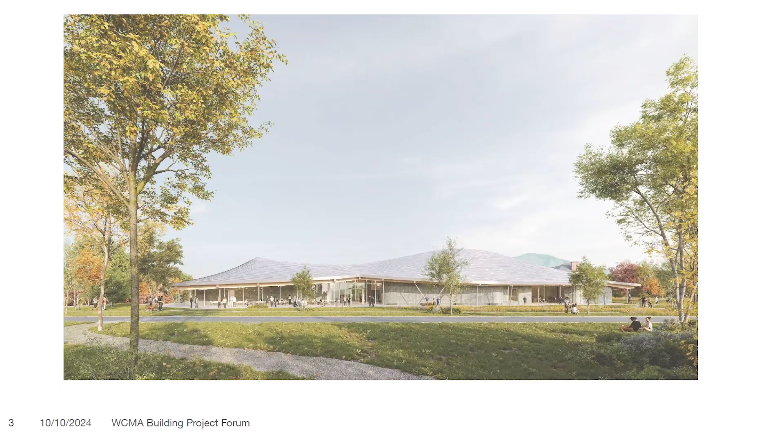The other cool thing in the exhibition at the museum is there's a model, so it's really fun to see that. This is the view from the south. It is the view essentially from the Rotary.

So the roof is clearly a defining feature of the building, with an elegant profile that resonates with the mountain landscape, and material that really harmonizes with the quality of light outdoors and contributes to an open, integrated feeling with the landscape. As you can see from the image, the new museum will largely be on a single story, with all the public, gallery, and classroom spaces on the same level as the entrance. The idea is to create an expansive ground floor experience and ease of access and navigation.

The other thing I love to highlight at this early point is the location. It is at the entrance to campus and at the entrance to town, and it carries a really energizing message that Williams and Williamstown are a place of creativity and community. The welcoming and approachable design signals that the arts are for everyone and really an inclusive and generative force in our town.

The new museum is being built for greater access to students in the form of an expanded study center and expanded exhibition space, also as a hub for the community, as a welcoming, accessible, free, always free space for spending time with art, attending special programs, including what we expect to be an expanded K-12 program and family programming in our new facilities. We haven't been able to do as much of that before, but we're excited about doing that going forward.

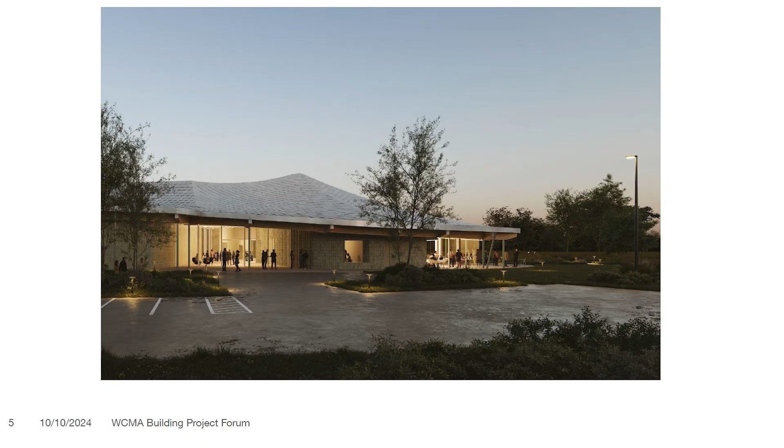One of the really special things in focus for tonight is that the building architecture and the landscape architecture are conceived totally integral to each other. We're really leaning into the interdependence of museums, art, and the natural world, and we're excited about the landscape being equally part of our educational and aesthetic program. So the values of environmental stewardship, educational potential, openness, lightness, seasonality—these have all been guiding principles for the landscape design from the very beginning.

With these aspirations, Reed Hildebrand has been the ideal landscape partner, and I'm really delighted that Beka Sturges is here to present the landscape design in progress tonight. Beka is a principal of Reed Hildebrand. She manages the firm's New Haven office. She leads both private and public projects, and I want to highlight especially a few examples of her museum work.

She's currently working on landscapes for the Powder Art Foundation in Eden, Utah, the Smithsonian's Hirshhorn Museum and Sculpture Garden in Washington, D.C., and closer by, Storm King Art Center in New York's Hudson Valley. Closer yet, Beka has led the firm's work at the Clark for the last decade and has served as the project landscape architect and manager for its award-winning expansion. Reed Hildebrand has also worked with Williams College over many, many years on an overarching landscape assessment.

Most important for the mission and vision of the new WCMA, I want to highlight something I've found inspiring, and that is how Beka's way of engaging with the landscape, her deep love of plants and ecology, really drives her practice and the way she advocates for new ways to reconcile conservation and programmatic goals. She's a committed educator, which resonates with us very much, including as a senior critic at the Yale School of Architecture. Ecology and education are driving forces for the future of museums as a whole, and for WCMA in particular. We feel that the landscape design we're working on together with Beka will embody these passions that fuel her vision. So we make a great team, and I'm really thrilled to welcome you here tonight, Beka.

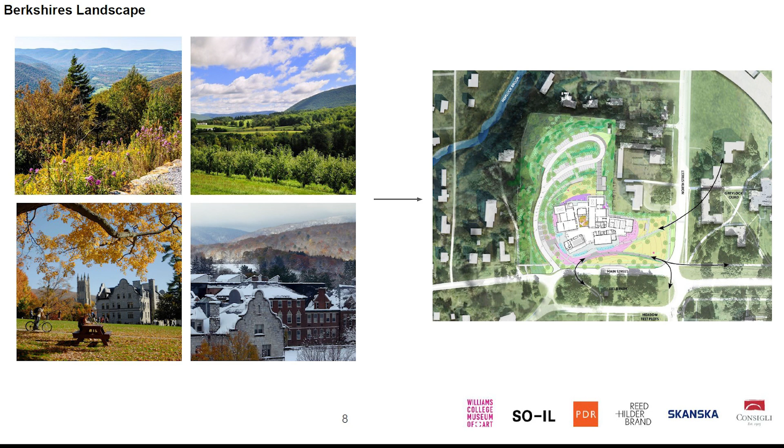And so I think we brought some of the lessons that we learned working on the Clark to the way we thought about this project here. With that in mind, we tried to bring together those distant views of the hills, the forests loved around here, the pastoral and college landscape that many people are drawn to Williams for, and try to return some of the views that had been obscured over time by the way the inn had been developed.

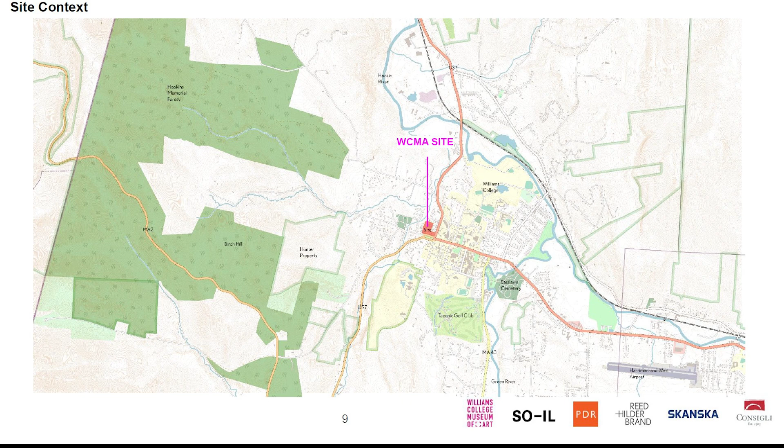So thinking about that site context, one of the things that's unusual for Williams about this site is that it's kind of at the edge of town. The fact that the forest is nearby is something we wanted to bring a little closer while bridging with Field Park and Greylock across the street.

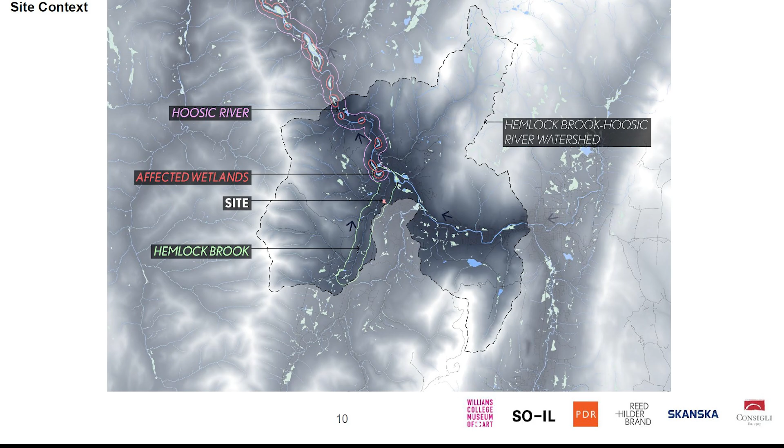It's also an interesting site because even though you don't feel it there, the stream, or brook, runs right by the edge on the west. We've been interested for a while in trying to make the streams and waters that surround Williamstown more central to how everybody experiences it. They're really beautiful, there's a lot of good habitat, the sound is soothing, and they bring great health to our communities if they're respected and treated well. So the fact that we're very close to wetlands and the brook on this site, we thought was a wonderful asset.

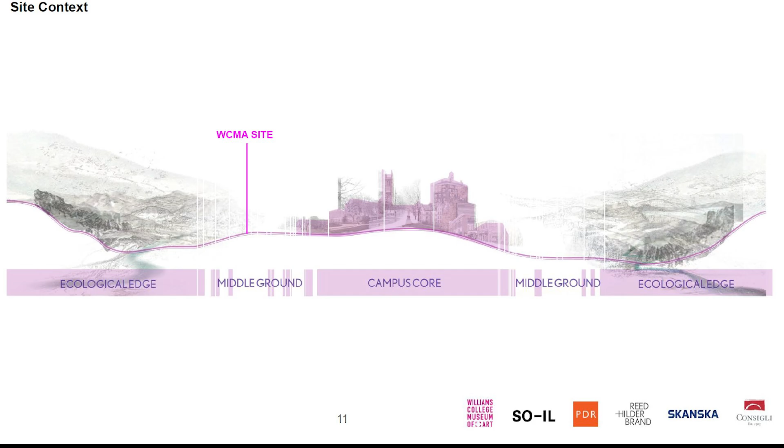Starting in 2017, we were invited to help Williams think about the campus landscape. It was an interesting project because it wasn't a master plan, it was very much a study, so it was called the Landscape Study. You can look at it online, it's available.

One of the things we came to understand about the Williams campus is that there's all this amazing nature at the edges, which we called the ecological edge. Then there's the campus core. But then there's this almost lost zone that hasn't seemed to have a really clear intention around it. We brought that forward as an exciting potential for the future of the college, in terms of thinking about designed ecologies and how you can teach an appreciation for nature and stewardship. This is the first project we've gotten to work on with a college that allows us to think about what that could mean—how can you design a site that serves all the needs for teaching and community coming together, and also seeks to achieve the highest ecological promise?

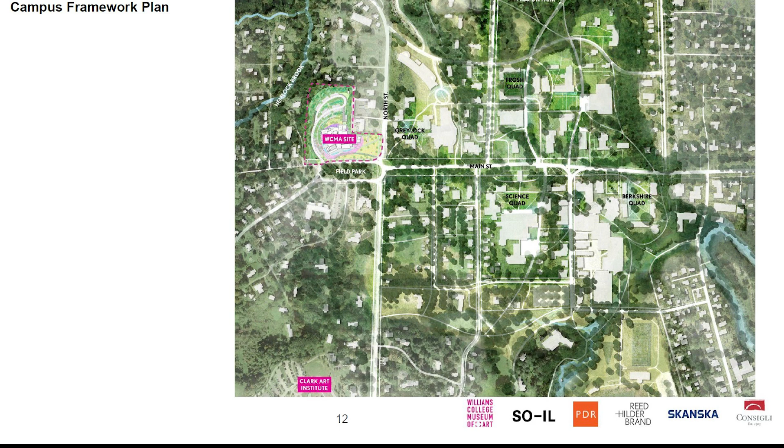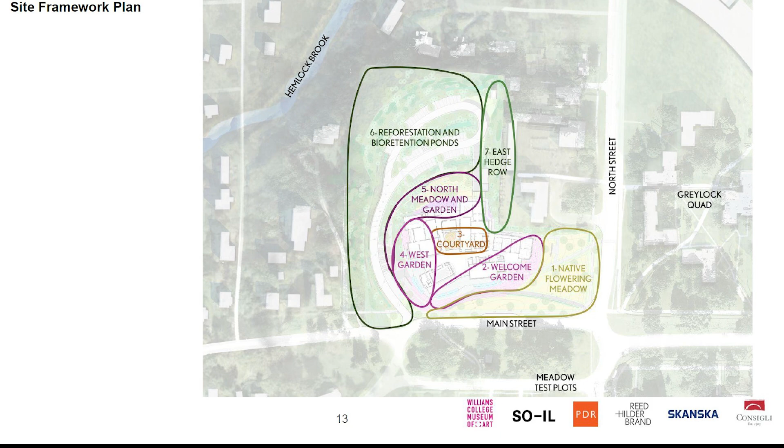In a similar way that the building itself, just as Pam was saying, responds to different conditions and reflects the activities happening inside, we did a study of the different east, west, north, south conditions and how we could reattach to our context, our neighbors. We've established different environments that move around the building, which you experience coming in from the west versus from the east. I'll walk you through those now.

When you start making a landscape, one of the first things you need to understand is what exists already. So we did a pretty careful site inventory of the plants that were on the property when we started. But it was important to us not just to stop there, but because we really see this as an extension of the campus, to walk the campus and do an assessment of the plants that are flourishing on campus and the ones that there's been a lot of problems with.

For instance, a species that keeps coming forward as maybe being a great species to plant here is the native blueberry, but for reasons we've come to understand, it tends to fail on every single project it's been planted on across the campus. So we did a lot of work both on the immediate site and the larger campus to understand what's likely to really flourish in this location.

And then there are great aspirations at the college to meet the best possible stewardship and sustainability standards. So as part of that, this project is going after ILFI certification, or Living Building certification, which is a very ambitious standard to hold a project to.

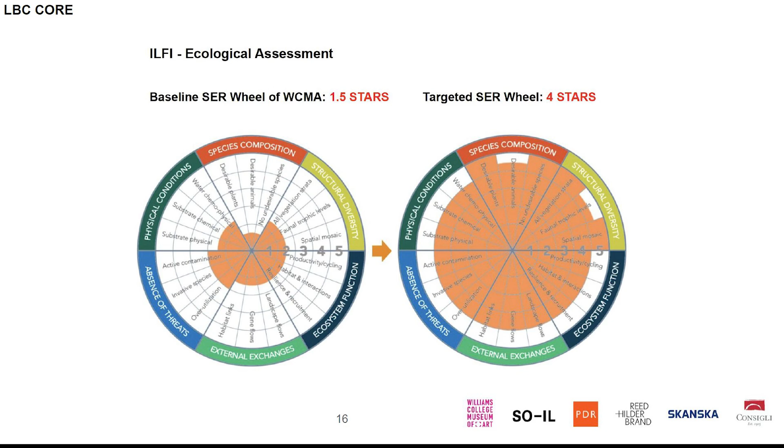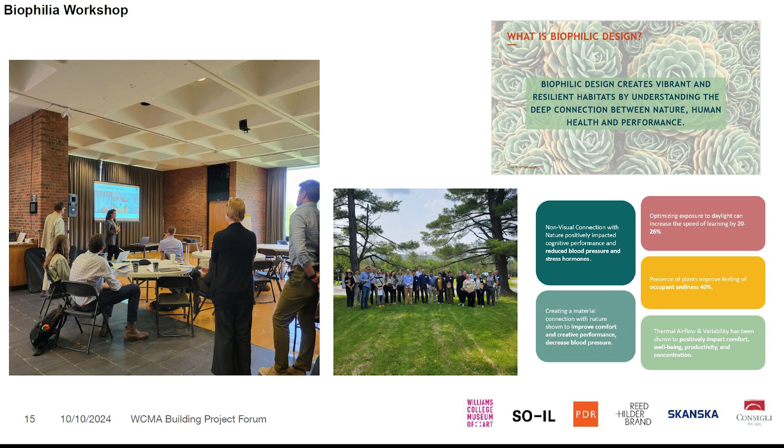Then we had to identify targets. Because of the past use of the site, the amount of invasives present, and also contaminated soils, the existing site scored very low. We've set pretty ambitious targets for things like species composition and biodiversity going forward.

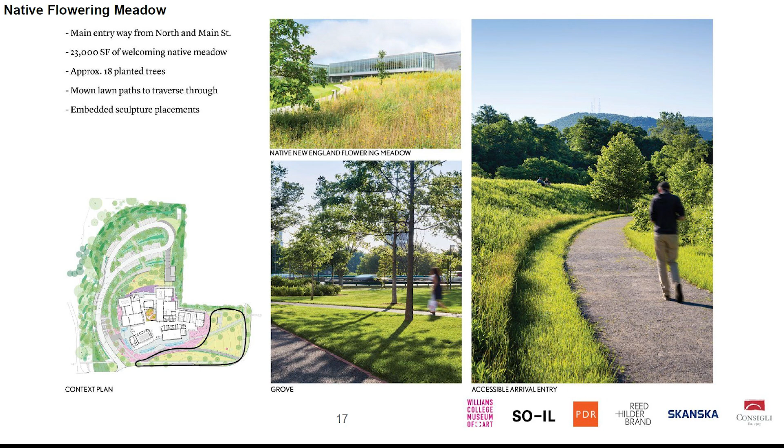The way we're planning on achieving that: on the east, we're going to be introducing a native flowering meadow. This is what will greet people as they're coming from campus, and it will also be the condition across from Field Park.

We just installed yesterday a test plot for a meadow sod that we might be using. You can see it at the south corner of Main Street and the intersection of South Street. It's newly established, but if you want to see some of the species we're looking at bringing into the meadow, they're there.

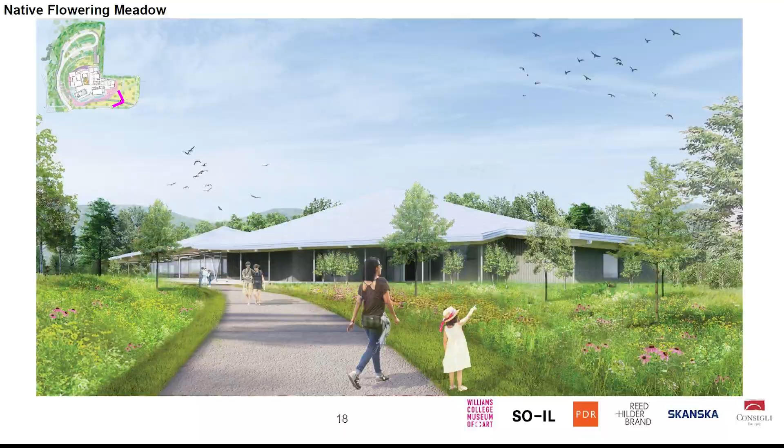This is basically another portrait of what Pam already showed you. The idea is that this is meant to be multi-season with a lot of species diversity. Here's a sample of some of those plants — a lot of asters, a lot of coneflower, definitely a stable base of fescues and sporobolus, plus some shrubs and plants.

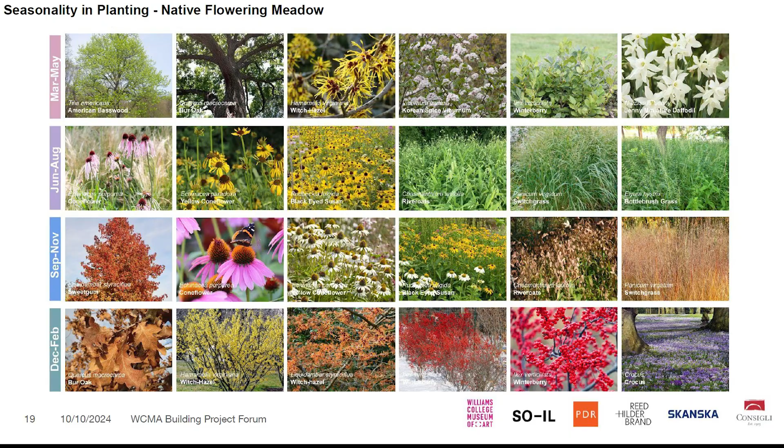We're also not being 100% native. We're using some well-adapted, friendly naturalized species. So daffodils, for instance, not native to the United States, but really a wonderful part of campus life.

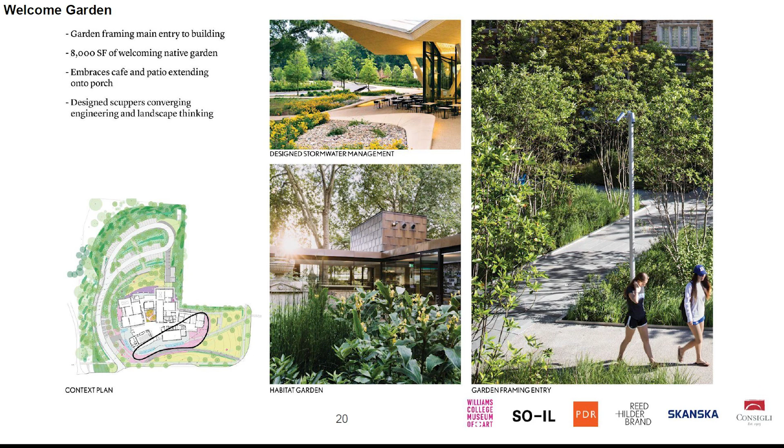We also are going to have a garden, and it will wrap the southern, western, and northern edge of the museum, and it'll be what you cross to enter in. It's meant to mostly be a woodland garden with some flowers, with a lot of seasonal interest, and it will be fairly evergreen.

One of the things we identified in interviews with students was that for many people, particularly those who didn't grow up in New England, the fact that there are no leaves on the trees and the landscape gets so gray for much of the time they're here is a little depressing. So they asked if we could include more evergreens.

We've done that particularly in the immediate garden area. This is a view of what it might be like to come through the front door — a sneak preview of the courtyard that is inside.

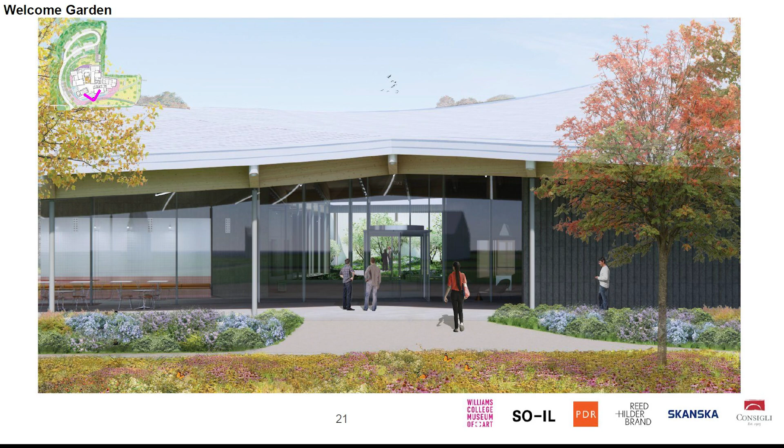The welcome garden is going to have more flowers as part of it and more color, including things like anemones, lots of asters, and some dogwoods.

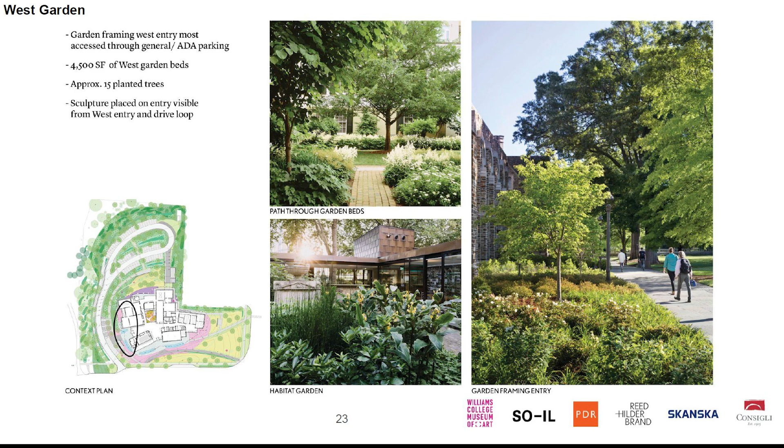The west garden is an extension of that. It has more shade, so it's going to be even more of a woodland garden, with things like viburnum.

This is a view taken a little further back than the one Pam shared with you. It's meant to be lush but also welcoming, so we want it open enough that everyone can see each other clearly and say hi.

We will be having some bulbs, so crocuses and some hellebore, also known as Lenten rose — again not a native plant, but one that does beautifully in Williamstown.

A hope we had for this project, and something we're really excited about, is trying a new method of reforestation. When we evaluated the existing slopes, particularly on the north and west of the site, they were mostly Norway maple and a lot of dead ash.

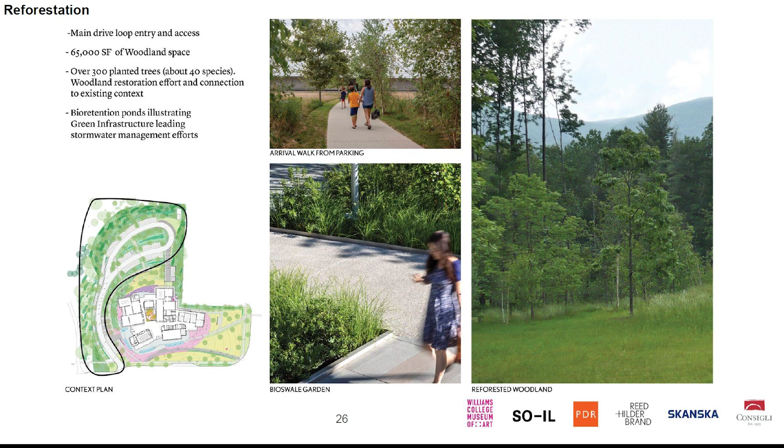It became clear that most of the plants there weren't ones we could keep and still meet our ecological targets, so they needed to be removed. But we're determined to have more plants and more biodiversity after this project than when we began — we're bringing 40 species of trees to this part of the project and planting more than 300 trees.

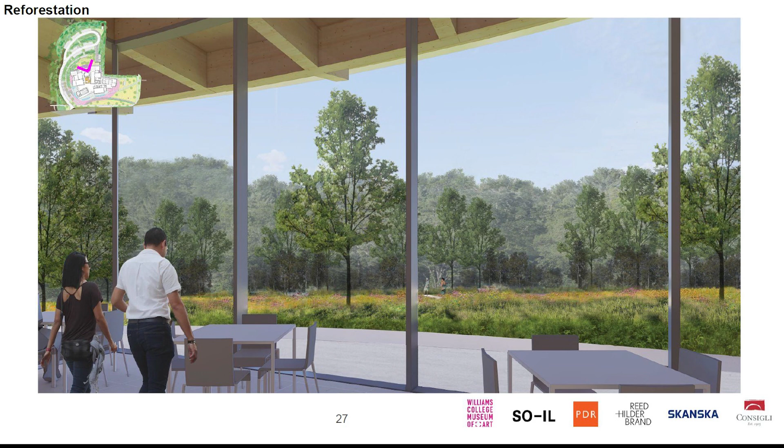And so this is a view looking out from due north. One of the things you can see is that we're trying hard to add all those additional plants, but not obscure the views. Really making sure there are moments where you can see to the hills is a critical part of what we're trying to achieve.

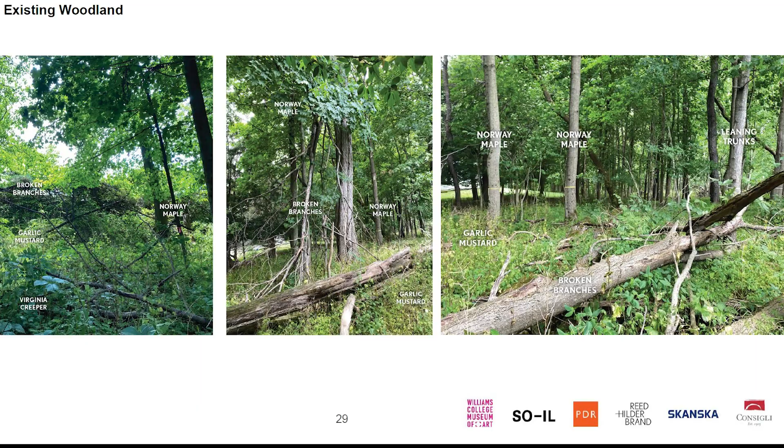And these are just some examples of the existing conditions of the slopes there, and you can see the quality of the woodland. I think from far away it looks just fine, but when we got in there and looked at it closely, it's really a sick forest, mostly full of invasives.

So the goal is to build a thriving, adapted forest condition with many different species so that it's resilient, species that grow at different rates. Some will be really slow growing and take their time, and others will grow rapidly and provide cover and habitat quickly.

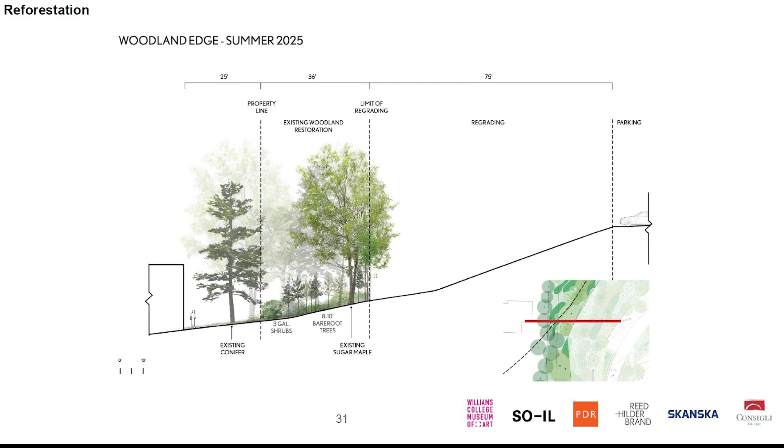This is maybe a little technical for some of you, but we thought it might be helpful. It's a section cut through that steep slope on the west, and shows what it will look like this summer when we've cleared for the regrading required to get the drive and parking in. Then it shows where we'll be starting to replant. We hope to have plants established and growing pretty well by the summer of 2027.

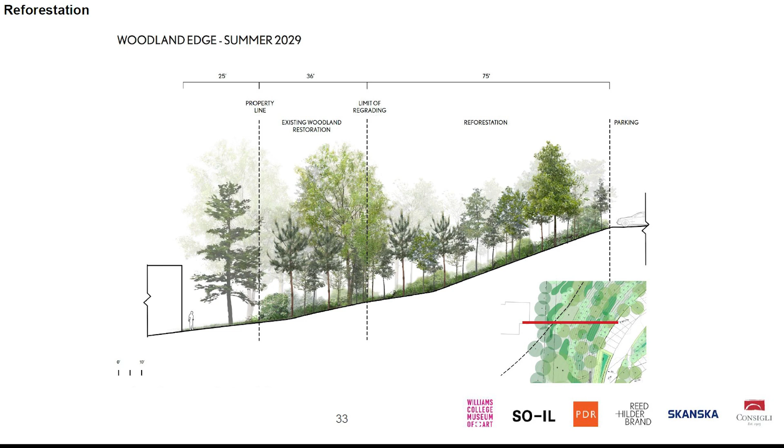And then we thought we'd show you just a snapshot two years later, as those plants grow and the height and density really start to be established.

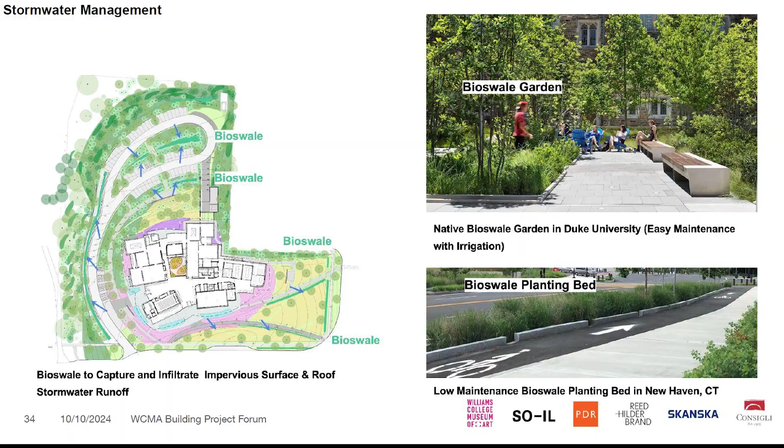Another big part, as you're probably familiar with living here in Williamstown, is that because there is so much ledge and so much clay underground, it's really important to manage stormwater carefully. So we've worked hard with our civil engineers and others to shape the ground so that we're capturing as much of the water that falls on site as we possibly can, and infiltrating it wherever possible and using it for irrigation to water all these hundreds of plants we're planting.

This is just a little diagram showing how that's going to work. But because the slopes are steep, because we're right next to the brook, we're really doing everything we can to manage the water quality and take care of all that rainwater and snowmelt.

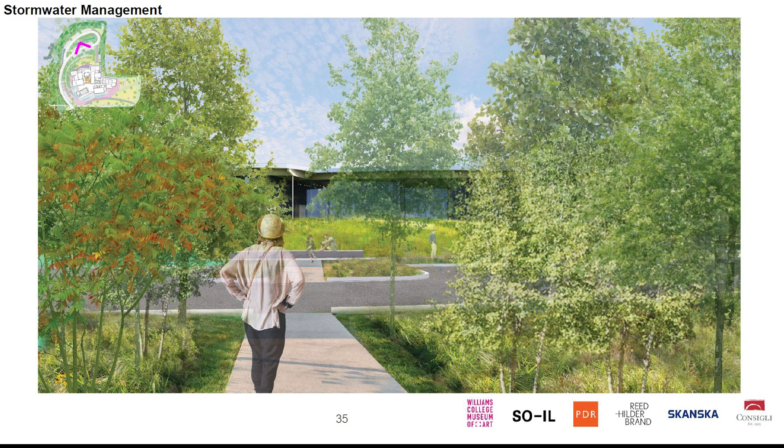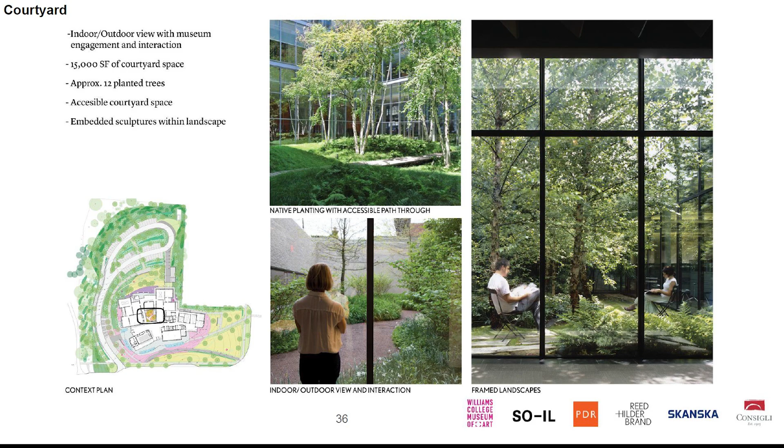And then the last thing I'll talk about is the courtyard. A very exciting and important idea from almost the beginning of the project was the question of how can we make nature and a celebration of plants really central to what everybody understands art at Williams to be. So in a very literal way, we're putting a little pocket of nature in the center of the museum itself. This is another space that will have a certain degree of evergreen quality and little mini hills, and be a place for both the encounter with art, display of art, and a little bit of hanging out. There'll be some seating in there.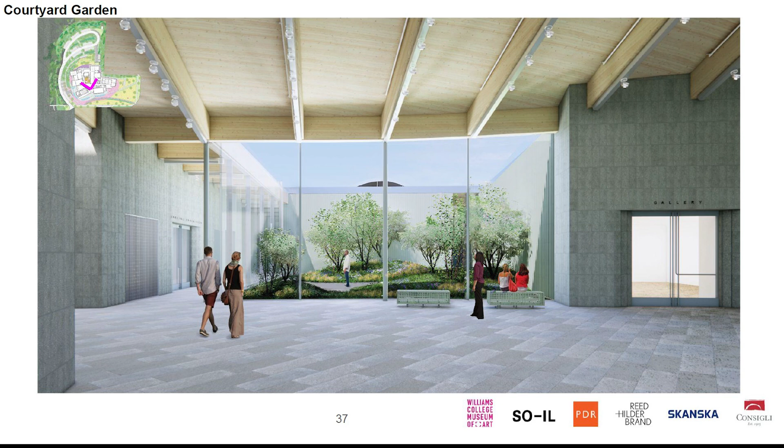And then stepping back a little to what you'll see when you first cross the doors - this is a portrait of that garden. And with that, I'm going to hand it off so you can hear a little more about the actual pace of this project.

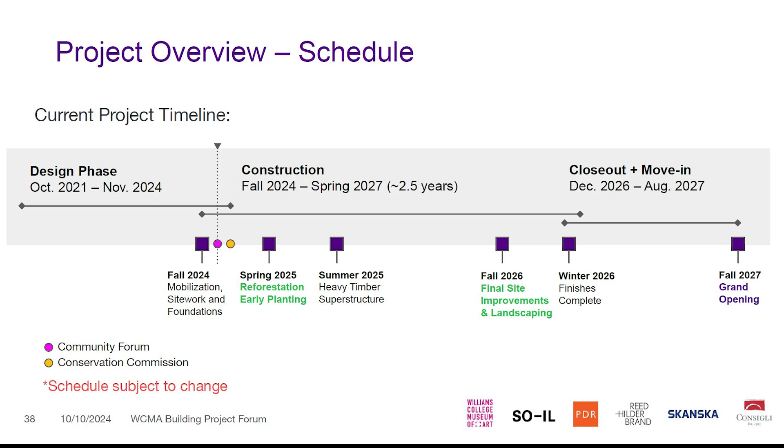Hey everyone, Stephen Andeman with Skanska, the owner's project manager, working with the Planning, Design, and Construction Department at Williams, just overseeing the project. So, as Beka mentioned, just a quick overview of the project timeline. I'm sure you've noticed we've mobilized the site this week.

We have some reforestation and early planting that Beka went through, in the spring of 2025, which is basically establishing trees, ground cover, shrubs, and the edge along the west and north of the site. Next summer, we're projected to have heavy timber superstructure arriving and getting erected on site. Fast forwarding to the fall of '26 is when we expect to do final site improvements and landscaping.

Finishes within the building will be complete in the winter of '26, and then commissioning, performance monitoring - a pretty lengthy period for museums - closeout activities, and move-in, which brings us to the fall of 2027, which is when we're projecting the grand opening.

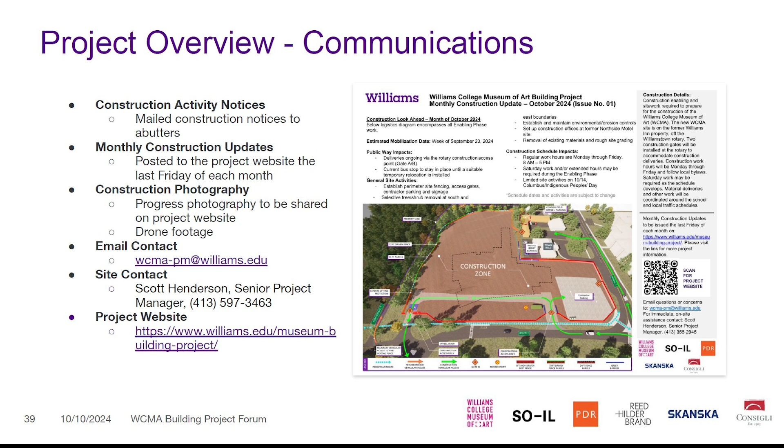Just an overview on communications. Anytime we shift to a new major activity on site, we'll be sending out activity notices. These go out to the abutters, and I think you can also opt in if you want to receive those. We'll also be posting monthly construction updates to the website on the last Friday of each month. The one for October is up there. Feel free to visit and take a look at what you can expect to see, or any impacts to public ways.

Throughout construction, we'll be taking a lot of photographs, and we also have a drone, which is pretty exciting. We'll post some of that imagery to the website throughout construction.

If you ever have any questions, you can email WCMA-PM@williams.edu. That'll go to myself, the rest of the Skanska team, Devin, basically the whole PM team. We'll respond. If we don't know the answer to your question right away, we'll definitely find the answer or reach out to the stakeholder that can best address your questions.

Scott Henderson is the site contact. So for any emergencies, if you see something and need to make a call to someone right away, Scott's the person to call, and his number is there.

We direct you to the project website as a good starting place for any questions you might have. There are a lot of different tabs for frequently asked questions, updates on construction, etc. So with that, I'm going to hand it over to Abby Berkevile from Consigli.

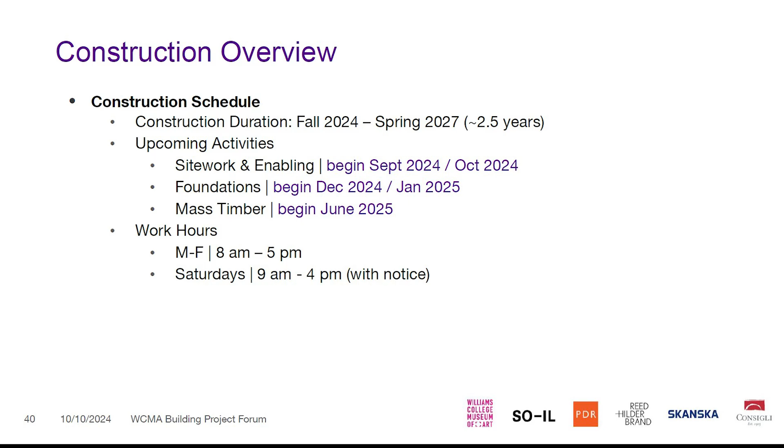As Stephen mentioned, we are starting on site this week. We've started putting in our erosion control measures around the project site, doing some general clearing of trees to be able to put in those measures, as well as putting in the site construction fencing around the entire site, which will start next week. So generally, we're starting enabling work this week, gearing up towards support of excavation around the southeast corner of the building to facilitate foundation work starting middle of December. Through the winter, we'll be putting in all of the building foundations and gearing up towards mass timber install in the spring of 2025.

Our work hours on site will be from 8 a.m. in the morning to 5 p.m. at night. We may have some weekend work, but we are really trying to avoid that. With that, I will turn it over to Irvin to go through our logistics plan and give an update on what we're doing on site for the next couple of months.

Some of the key things we want to note for the logistics of this site: our main office is located in the old Northside Motel. That motel will remain for the duration of this site, and that is also one of our starting parking lot areas. We don't want to impact the Rotary or the public, so those are some of the key things with our logistics that we thought about early on.

We also have a parking lot where we enter the site through gate A and exit through gate B. So we have scenarios where we're looking at how we can manage traffic on site. There are going to be some situations where sections may get blocked or trucks have to move and take a different path.

We do have a guard shack there on the corner of gate A. So we'll have a person staffed there so we can limit the impact of trucks being in the rotary, and we're going to get them on site. All contractors and trade partners know the project does not open until 8 o'clock.

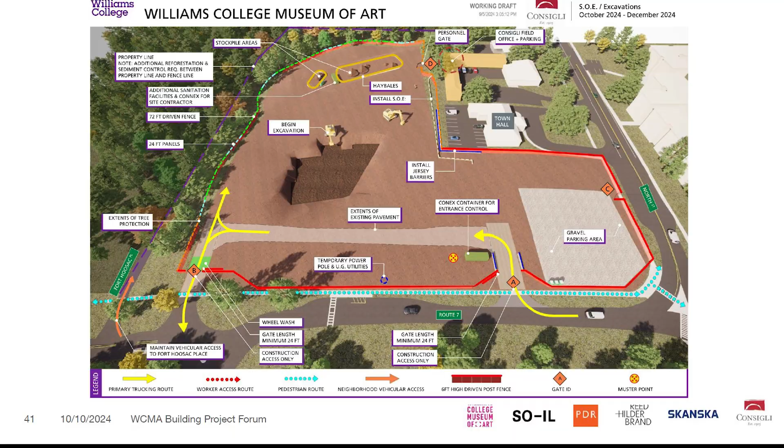The other thing we will do is have controls for erosion. Once a week we have inspections. We work with our landscape architect and civil engineers. We have other partners that do inspections besides us - our trade partner, our excavator does inspections, and our design team does inspections. We'll continue to walk through the site as we go through construction to help manage erosion controls as well as construction activities with our partners.

And Beka, thank you for walking with us last week and going through the trees, working through the conditions we're going to have challenges with, and managing what we have to go through with construction to make it a successful project.

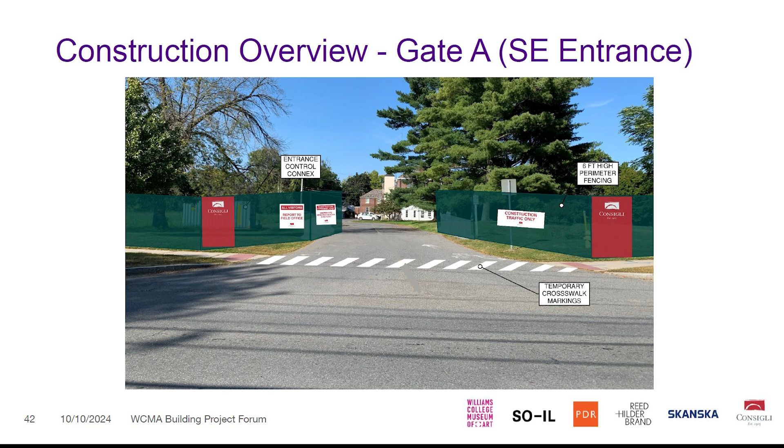We'll go through the next slide. So thinking about the public and the entrances, we know there are a lot of joggers and people walking through town. We're constantly looking at how to set back and get line of sight for the trucks, as well as being able to see the public coming to those areas. Once we have the fencing in place, we'll have all the signage put up, and we'll do additional crosswalk striping, so we can create a situation that's clean, thoughtful, and respectful of the neighborhood - a successful project with clean construction activity.

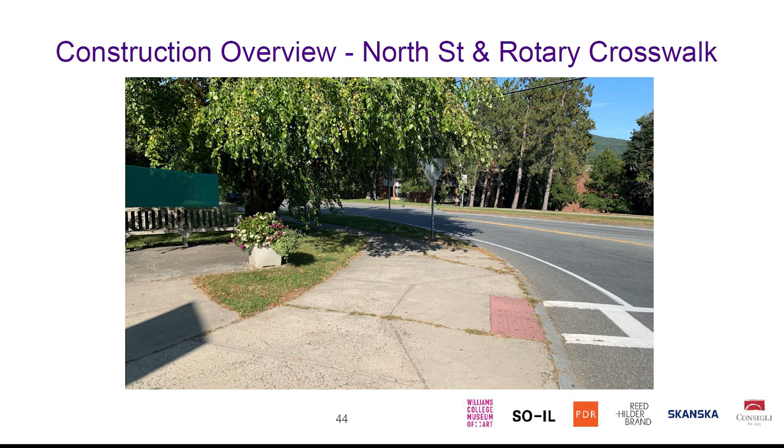At the corner of the rotary, coming in from Vermont on the north side, we're setting back the fence - we've cleared that back. We'll leave the bench in place. We're trying to make sure we have a good view for the public when they come to that crosswalk, so they can see the cars coming to the rotary, and drivers can see people trying to cross. We know that's a heavy area of use, and we're being mindful to make sure we do the right thing there.